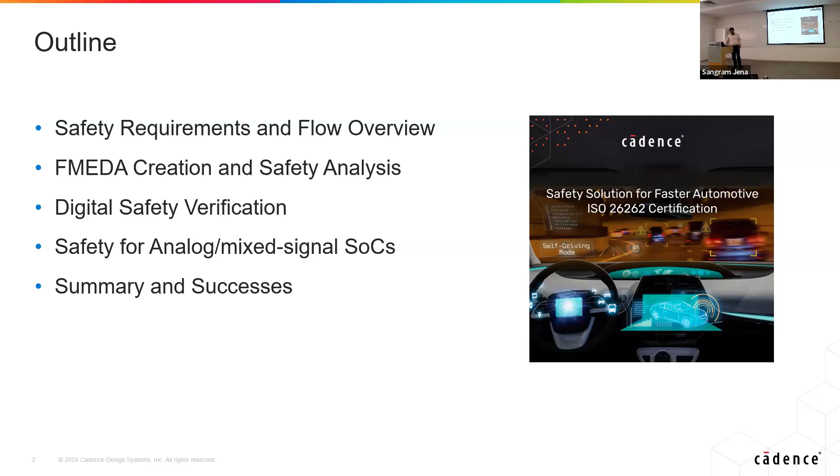So why? As I mentioned, this is a growing market, and key trends are moving towards automotive. There was a mobile market boom in the early 2000s, but now most of the trend is moving towards automotive, and due to this, a lot of new technologies are being developed to cater to the automotive market, especially 3D IC designs, chiplets, and lower nodes. Why are these things needed?

Because automotive is no longer just structural in the way of connecting and doing things. Now most of the control is moving into a central control network, which needs more chips and more interconnected networks. So more and more control is getting into IC design. You need more ICs and more high-speed connections inside the car itself for controlling things inside any automotive, right?

As I said, the industry is responding to the supply chain disruption. We see a lot of OEMs and tier ones getting into SoC designs rather than traditional semiconductors. Tesla and other biggies, and top mobile companies, are also getting into automotive. And traditional semiconductor companies already in the big mobile markets are also entering the automotive space, for example Qualcomm and Samsung. They are getting more into software and automotive platforms.

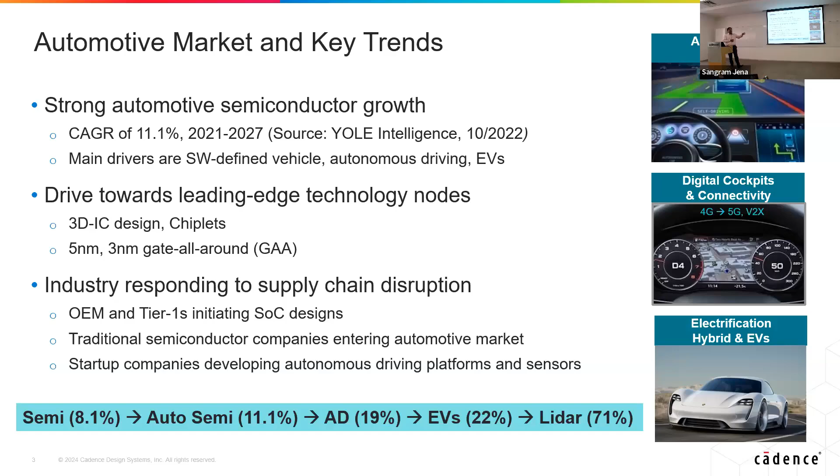Some examples, the top OEMs in the world, Ford and Jeep Cherokee. As you can see, previously a lot of these control networks, if you've seen the previous cars, were usually using copper cables, a lot of these copper cables running in the car, and a lot of these instrumentation clusters getting connected.

Now, we still have the mechanical controls at the top level to connect to the physical end connections, but all these are centrally controlled by what we call a vehicle computer or an integrated compute network, which has connections to a lot of various sensors, and it also connects to a lot of these actuators, which take care of the end results. So this is at a very high level.

There is a multi-threaded OS running in a real-time car with a lot of these hypervisor kind of things. And each one has different functions where we need a real-time response as quick as possible. That is where it is much more safety critical.

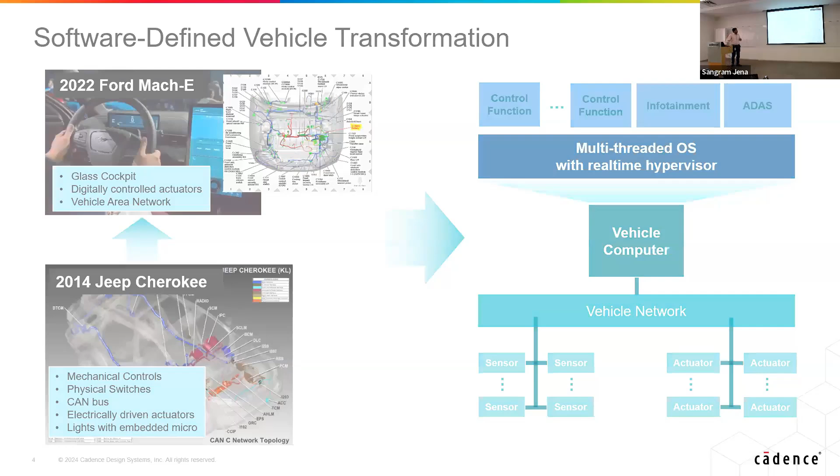This is the famous V diagram. I think no presentation will be complete without this. This is the overall ISO 26262 standard, where as semiconductor companies we primarily focus on parts 9 and 10, and there is a new part 11 which was added to give details about the semiconductor process analysis.

Some of this is the ASIL standards. We have these three metrics, the SPFM, the LFM and the PMHF, which are all interrelated with different metric data, but all this interrelated data will have a combined metric value which needs to adhere to a particular ASIL standard.

Most automotive components in general, any of the chips in the market, will tend to follow ASIL A, which predominantly doesn't need any safety. But for the components, I think Mike's slides also had a slide with a car, the rear light being an ASIL B or ASIL A kind of standard, whereas brake lights and headlights will be prominently in the ASIL B category, whereas your cruise control or adaptive controls will be in the ASIL C category, where there is autonomous control but you can still take control.

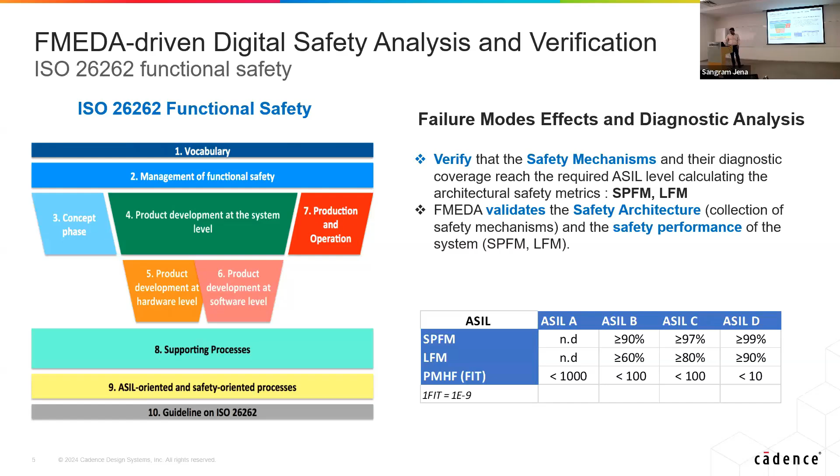Getting into the FMEDA, the slide was supposed to build one by one, but it came as a whole. We will go into detail from architectural till the overall DV kind of view. Whenever we start with the functional safety concept, we start with the functional concept. I think in Mike's slides they brought up the HARA stuff. If there is a slippery, wet road and the brake control is failing, what happens? That is a functional concept.

From there we derive the architectural level data. When we don't have a design, we start with an architectural estimation. That is where the FMEDA architectural exploration starts. You don't have a design, but you know what blocks are there, you know what ASIL library you're getting into, you take estimated data and you create an FMEDA at the architecture level. So these two you are doing at an estimation level, right?

You don't have your design implemented or running anything on it. So you just do an analysis at the estimation level. This can be a little bit more optimistic, but once you get into the details, once you implement it, once you have your netlist or the number of instances, then you can have a detailed FMEDA. You just populate that data into the FMEDA.

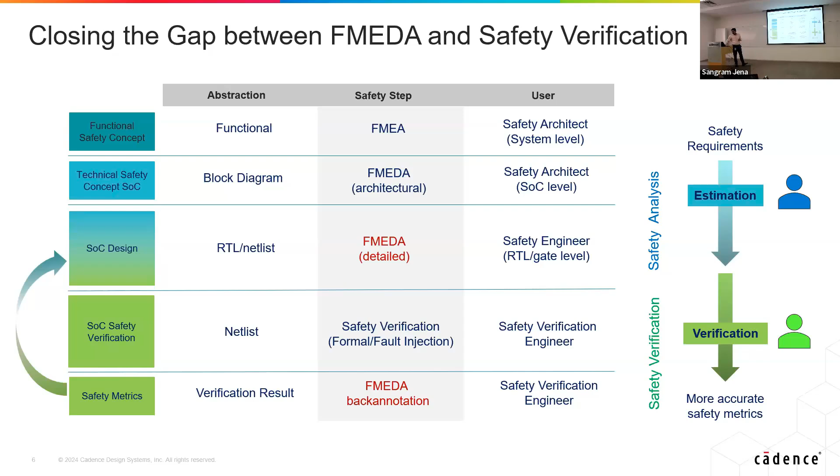So this slide will give you the overall picture, the cycle of things which are happening, and in the next slides we are going to talk about how we are going to do this using a Cadence flow of things. Okay. So as I said, that's the cycle. We start with an architectural FMEDA, and we use this flow to get into a detailed FMEDA and get the results and implement it back to the overall FMEDA.

So we are also working with Accellera. We have a safety format which is called the Unified Safety Format. Accellera is a standard which can be called an incubation to the IEEE standard. But currently in IEEE also there is a working group which is working on a safety standard. So most of the things we are adhering to, but in the end, whatever IEEE standard is going to be there, Cadence will follow that standard also.

Okay. So we call our safety platform the Midas safety platform. So we start with the FMEDA and we create the safety verification plan based on the FMEDA inputs. Once we have this, now we get into the design level details. That is where we run the actual design. Using the USF format, we can gather all the information. We can either use it in our verification flow, where we can do the complete safety verification. On the same USF format, because we have all the gate level details, we can use it in the safety implementation flow, where we can take those details into our synthesis tool, Genus, and Innovus,

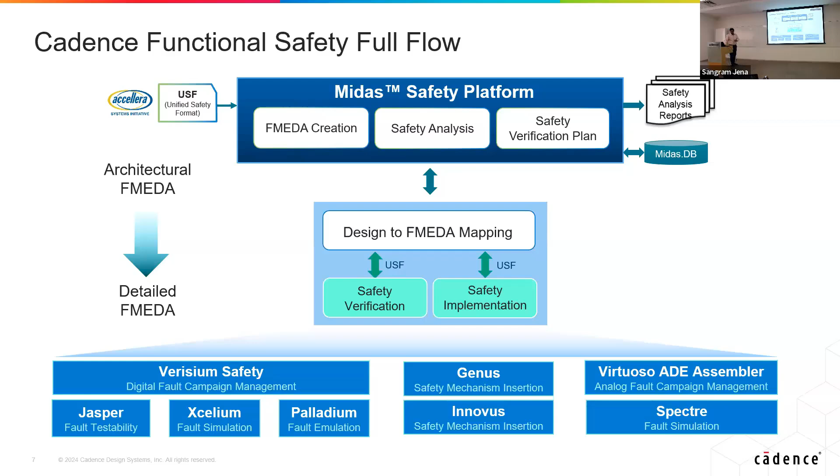Okay, so this is the MIDAS platform, as I said, which can drive both the digital and the analog safety flows. We can do architectural exploration. That means I can start with the architectural FMEDA analysis. We'll come to that in the next slide. Also, we can do early safety analysis or a detailed safety analysis, which is nothing but a detailed FMEDA. We can do both things directly in the same GUI.

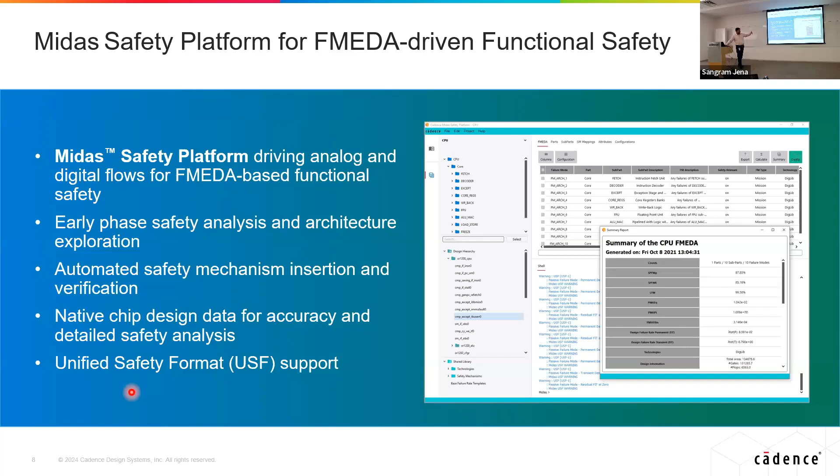And as I said, currently we have support for USF. But again, we also support whatever IEEE is going to get into. And this is how the GUI looks, where it will give you all the details. This seamlessly integrates with the very same safety campaign manager, which we'll see in the next slide. So this is the early architecture FMEDA setup.

So at the architecture level, you just go to the GUI. You select what type of project you are entering, what ASIL you need, whether it is an architectural or a detailed FMEDA, what type of report you need, what the entity is, and then based on this, you come into the next 3 steps where you are creating an FMEDA. In the entire SOC, you can select parts. From the parts, you can select subparts.

Assume your part is your CPU. From a CPU, you can have a subpart like a MAC or an adder, subtractor, whatever it is. And for each of these, you can create failure modes directly in the GUI boxes. And you can have your safety mechanisms. You can map them to the failure modes, run your safety analysis, check the reports. And if you want to do some queries, you can do some queries. We'll see that in the next slide.

And even at the architecture level, you can do some rule checks and see, for example, whether safety mapping is available for all the failure modes or not. So using the rule checks, even before getting into the next steps, you can verify whether your FMEDA is clean or not. At this level, you can start directly with the GUI.

It's not like it can't be done otherwise. A lot of these companies use an XLS-based flow. They have some Python scripts for everything, and they run them. All these are integrated into a single GUI-based flow here, making your life much, much easier.

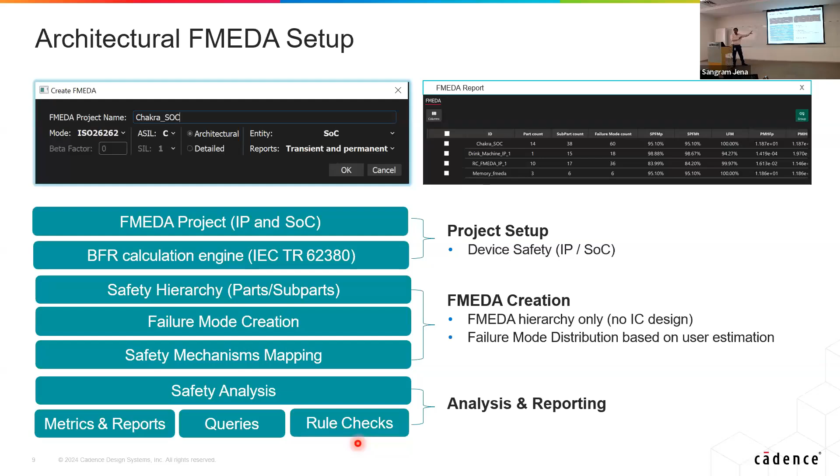So this is what we do at the architecture level. We take the architectural FMEDA now, that's based on the estimated data. Sorry about it. We create the FMEDA, then we create a verification plan. Then we take this at the architecture level.

Now we get into the design level stuff. We take the design, we are using the USF. We take the design, we map it with the implementation tools like Genus or the verification tools like Xcelium and Virtuoso for digital and analog simulations. Then we take this mapping.

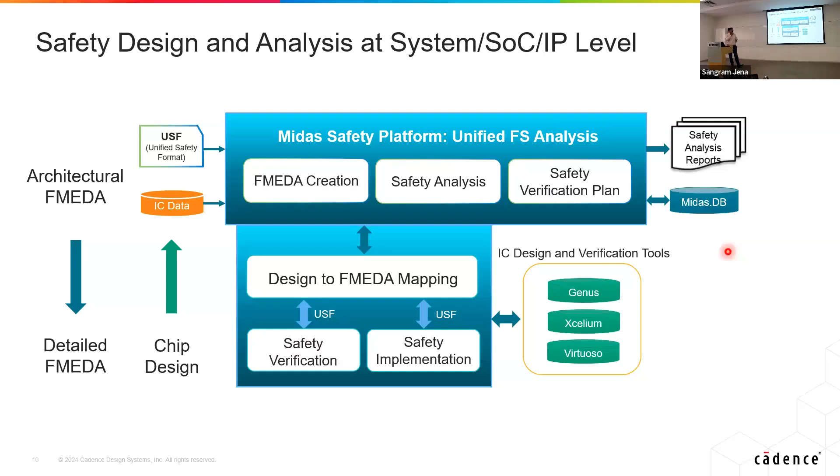This data, what we collect, is called the overall chip design data. That we pass it on as IC data, back annotated with the architectural FMEDA. So this is the cycle which usually happens in any of your safety cycles in any of the industries.

Yeah, whatever we discussed in the previous slides, more at a GUI level. You start with the architectural FMEDA, that is the GUI which was missing two slides back. You have the architectural FMEDA getting created. Here you don't have any of the design data, but you only have the FMEDA hierarchy.

You have the failure rates and distributions based on early estimations, based on your rough analysis kind of thing. Okay, these are the blocks which are there. These are the gates which I'm going to use. So roughly, these are the numbers which might come here. So this will be a little bit on the optimistic side.

So now I take the design, I implement the design, I get a netlist. From the netlist, I know the number of instances, the total area count, all these details, I just pick it. The advantage, as we saw in the last slide, is the tool is directly connected with Genus, Xcelium and the Virtuoso platform. So the tool can directly get this data.

If you are using an XLS-based flow, you need to manually enter all these data by yourself. Whereas here, the tool is automatically connected. We know what instance data is there. It populates the data and automatically you see, I think this is very minor, but you can see the SPFM data which is there.

Compared to the previous SPFM data, this is a little bit lower because before we just put an estimated number, more on the optimistic side. Whereas here with the design data and the mapping, I have this estimated data a little bit on the pessimistic side, or a little bit realistic.

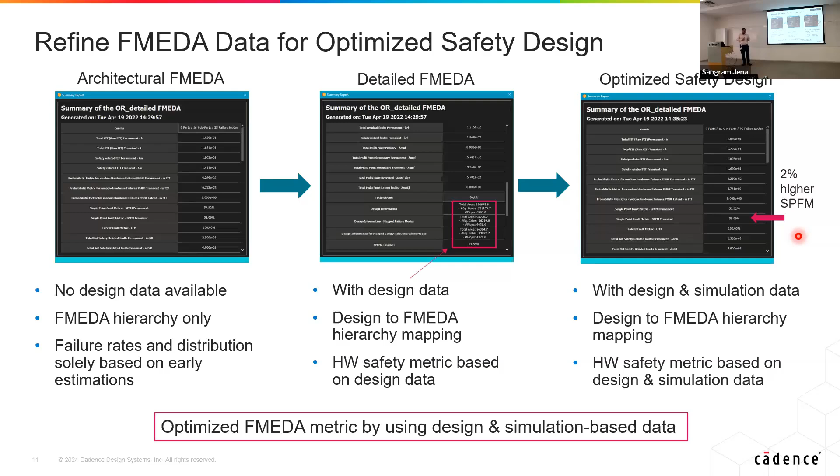The same thing we saw in the GUI can also be done using the USF commands. Very simple. Set FMEDA. I can set up my FMEDA. What type of ASIL metric is needed? Is it B or C or whatever it is? And what type? Is it an architectural or a detailed FMEDA? What type of technology am I using? What type of BFR calculation am I using? I can set all these things using commands.

I can create a technology for digital, and set the FIT data for it. And as I said, these are the parts and subparts which I can create for my FMEDA. We can start with a CPU core. This is my CPU core. For my FMEDA, I can either give the instances of my part, or I can directly give a gate count for it. Both are possible for the calculations.

And now I can also add multiple subparts. The CPU has multiple subparts. I'm here putting one subpart as fetch. I can have multiple other things like add, subtract, multiply, or MAC, or whatever it is. For each of these, I can again give the instances or the count data.

Now for each of these architectures, I can create a failure mode, and also I can assign a safety mechanism to these things. So I create a failure mode and say, okay, what is this type of failure mode which I'm creating, and what is the part number which is associated with this particular failure mode. I give this data and I can say what is the type of fault: is it a permanent fault or a transient, or what is it? I just can specify it directly here.

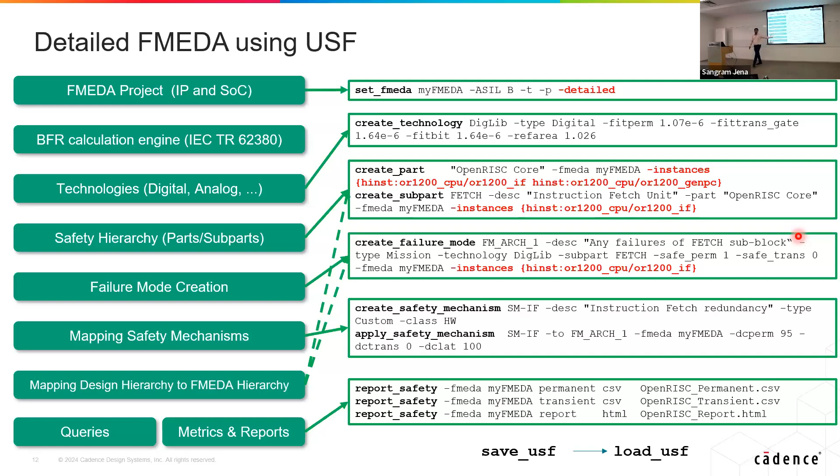You can query it. And at the end of the day, once your safety campaign is done, you can generate a report directly from this command, and you can generate this report either for permanent, transient, or an overall report, which you want to give to your end customer. So that was the how at a very top level.

And as I said, we start with one GUI at the top. So for the end user, it is going to be a top-level MIDAS safety platform GUI from where he's going to launch things. And if there is a DV engineer who is already using a Cadence flow with the Cadence Verisium Manager, things are going to be the same for him. The extra part for any safety engineer is that he needs to understand the FMEDA concepts. Otherwise, the rest of the flow is going to be as simple as that.

When I say the rest of the flow is the same, that is for logical simulation using Xcelium as well as the STL flow for emulation. So that is how we do things currently. However, as you note, one other point: the fault DB is common for all three engines. That means the same fault DB which we are using for the regular logical simulation will be used by the formal engines to prune some of the faults, and the same can also be used at the Palladium level.

So if you're having an overall SOC level campaign where you are using some of the STL libraries to do the emulation, as well as a regular SV UVM flow to do some of the logical simulations, you can have one single fault DB where the entire campaign, the entire DC coverages, can be mapped to your overall test plan. We'll see that in the next slide.

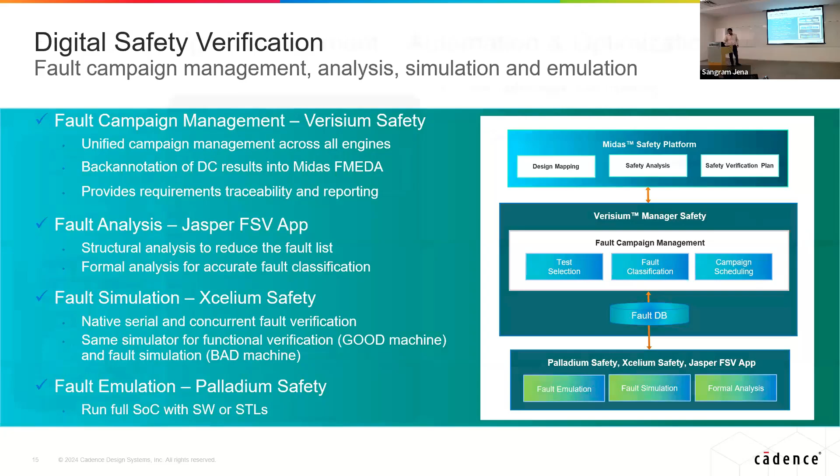Yeah, I'll just build this.

So this is what I was talking about in the previous slide. So overall, for a user, as we saw in the previous slide, the top MIDAS platform is there. That will give the FMEDA as an input to the Verisium Manager safety app. Now this has the various lists: your fault list, your strobe list, your test list, and your campaign configs. And this you will be running with any of the engines.

We forgot to add the Palladium safety, but assume Xcelium safety and Palladium safety can be done at this stage. And you have a common fault DB. So this common fault DB is used by the structural analysis or the formal engines for your overall fault reduction. Why do we need fault list reduction?

However efficient or fast your logical simulator can be, this is a very expensive campaign, right? Your fault campaign is going to be much, much more expensive, where you're going to run n number of runs. So instead of that, use the structural analysis or your testability analysis to prune your overall fault list. You can collapse it.

If some of the assessors allow statistical fault sampling, you can just sample either 1% or 5% of the overall faults and just use them, or you can use the fault collapsing mechanism, which is inbuilt in the Jasper engine. Use that and reduce the lists to only the most necessary campaigns. You only run those campaigns, right?

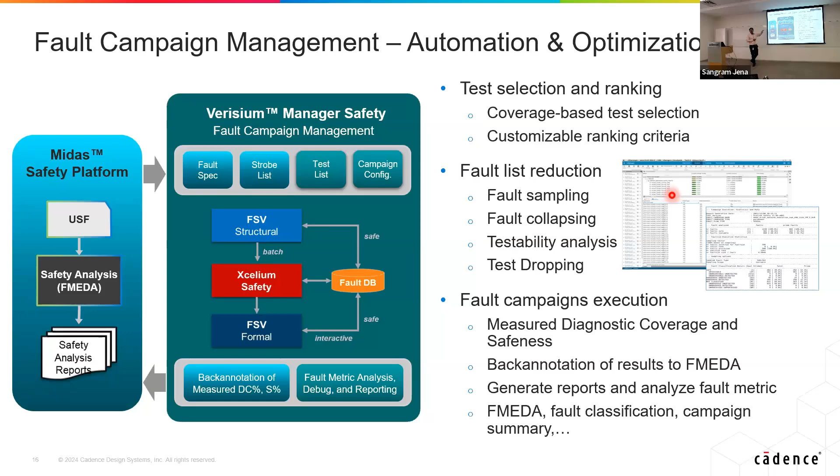And if some particular test is not working, or you need to debug or relaunch it, you can immediately switch to serial mode and run it, primarily for debuggability purposes.

If something is not getting executed in concurrent, you can very well switch that particular test, or this campaign alone, to a serial flow and run it, so that you have the best of throughput and the best of debugability, both in a single thing. So we support all three. You can start with serial, you can start with concurrent, or you have a hybrid flow where you can start with either one of these and switch to the other. So we have all the support for this.

We also have a flow we call the capture replay flow. We also have support for capturing and replay. We capture at some strobe list, we can capture the data and we can replay it. This is for huge designs. We support it, but we need to exercise it with caution. This can be a little bit error prone if you're not doing a capture properly and replaying it at proper cases. But we do have that support also.

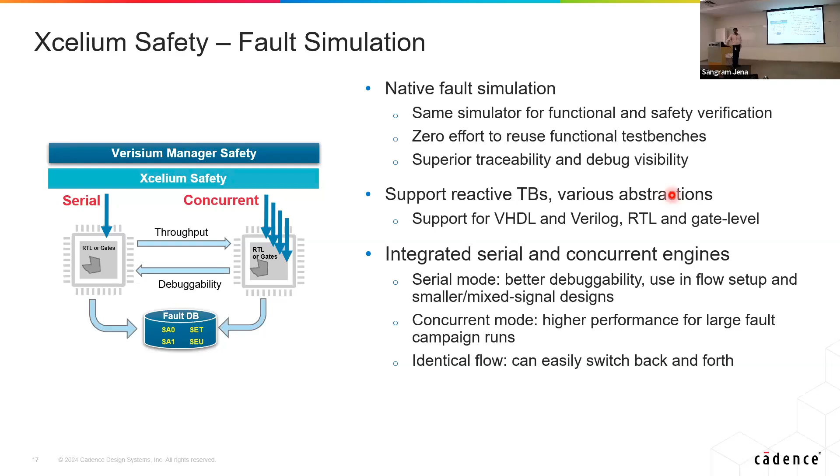Same case with Palladium. As I mentioned, the flow is literally the same. You just replace Xcelium with Palladium, and you can see this is nothing but a simulator flow, right? The simulator flow just replaces the engine. This engine is a Palladium engine and IXCOM compile. Again, you can see there is a central fault database. You can run the good simulation, you can run the fault simulations, and at the end you just do a compare, get the fault DB and pass it on.

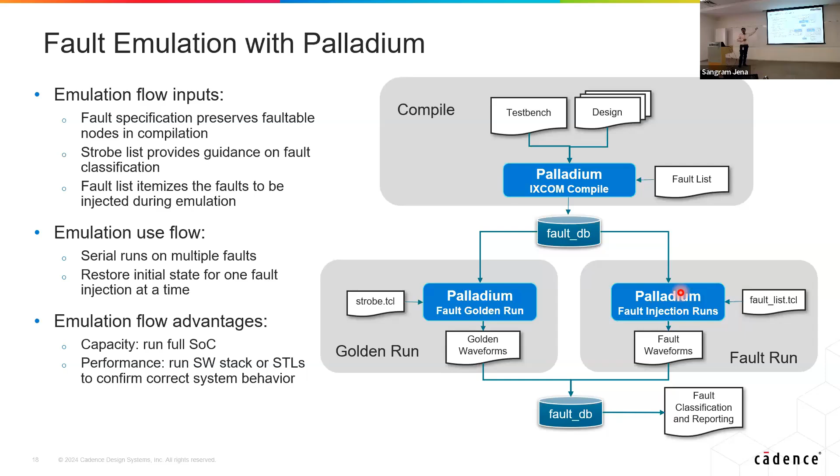Mostly, as I said, we are using it for the software stacks, or now there are virtual platforms getting developed. Like we have Helium, there are a lot of these virtual prototyping platforms where the software teams need a lot of software stacks to be created for automotive, right? OEMs need a lot of these things. So when you are moving to a platform like Helium, you can't run those software stacks with a logic simulator. You need a hardware platform. So your virtual platforms will be connected to Palladium. You run the entire software stacks through this and get your safety mechanism.

What we saw two slides before on Jasper, as I said, we do a structural analysis. First, we annotate the untestable faults in the database. Here we ignore all the safe faults and check only the prime faults, and the equivalent faults of those prime faults we ignore. For example, if there is an output driven by multiple inputs, a stuck-at on one of these inputs is going to propagate. So I can ignore all these equivalent faults and check only the primary fault. Then, once you do this, you use the FSV test constants to check all the particular tests.

You can see only what is needed for it, and then all the pruned test-based faults can be dropped. Once they are dropped, you have an optimized fault list which goes to the Xcelium safety campaign, and you will get to the annotation. In the end you will still have some 10% of remaining fault list. Up to this point, all these things are part of the flow.

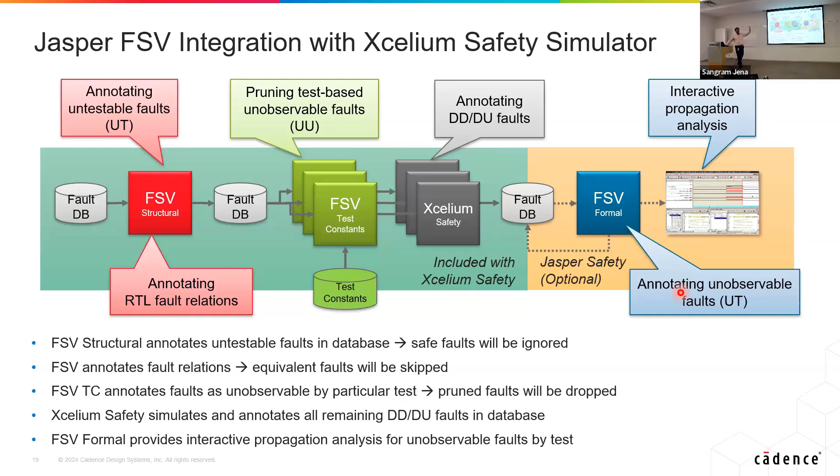You can still use Jasper, some of the properties of the FSV app, and then interactively do some analysis on it. On the remaining 10%, it can still do some analysis on the unobservable faults, and you can classify them into DD, DU, or UT. The green part is there with the tool. The Jasper part is the additional thing needed in the flow. But if you're writing a script or it is part of the campaign, in the campaign configurator you can select all these things and run it as part of one campaign. There is now more and more need for verification IPs for automotive.

As most of you know, Cadence is the market leader in verification IPs, and specifically focusing on automotive, we have a lot of these VIPs which are very mature and capable. As I said, we are moving away from traditional copper wire based mechanical networks to bus based networks, where you have Ethernet TSN, MIPI, or even now PCI protocols and other things getting into the picture, and we support all the CAN-FD protocols.

Going forward there will be UCIe and other things also coming in because of chiplet based design. So we have support for even UCIe and probably CXL and other things.

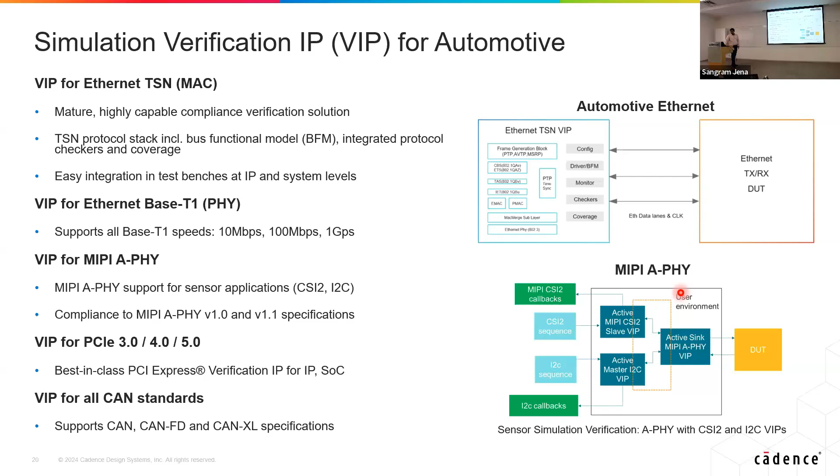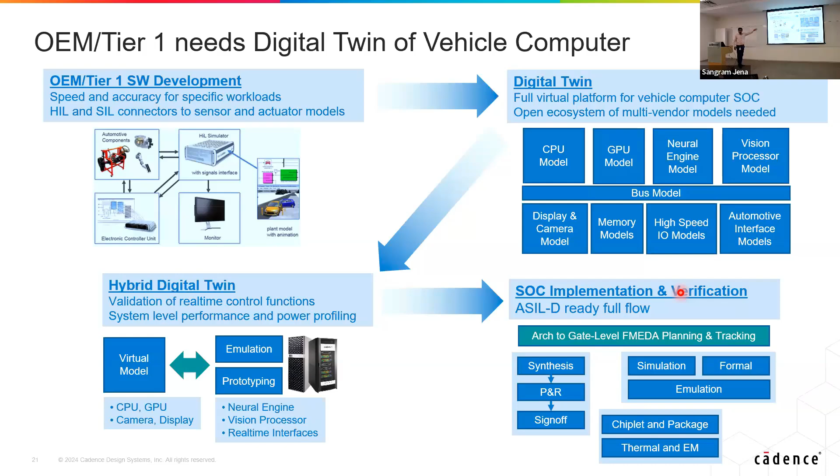This is what I was mentioning on the need for Palladium, because it is no longer just a hardware only area we are working in, right? Not just the STLs, but we also go beyond that, to the software stacks. All the OEMs need the entire software development. So can they do it before the hardware is ready?

That is where you get into virtual platforms, or in Cadence it's called Helium. You take a loosely timed model, you create a hybrid model. It's loosely timed, but you can do OS booting. You can get it early, even before the hardware is completely ready, because you're just making a virtual model. You can run it on any standard x86 workstation.

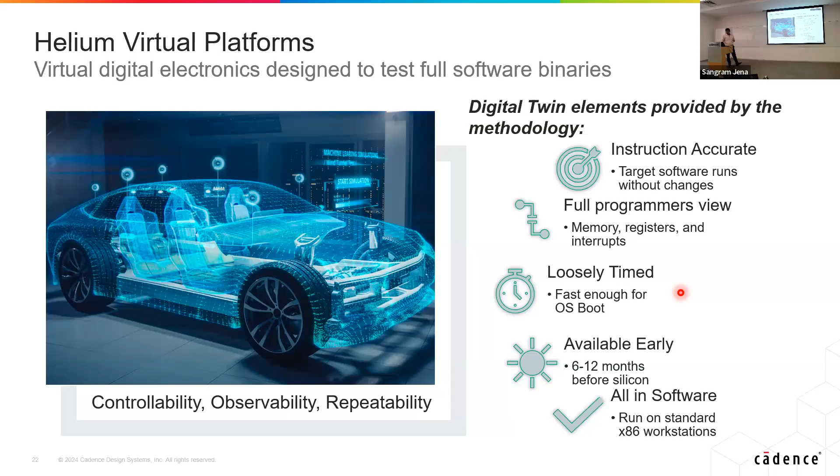This is primarily for software development, but you can still have a view of your memory registers, your overall control, like your interrupts and the pins, at a high level of abstraction. Take this and integrate it with your hardware, like Palladium or the Protium platform, which is already safety flow enabled. So you can run something already proven on your safety platforms. This will give you performance as well.

Even before the final chip is available, you are proving your software before everything is available on the chip. That's the advantage of getting into the virtual platform.

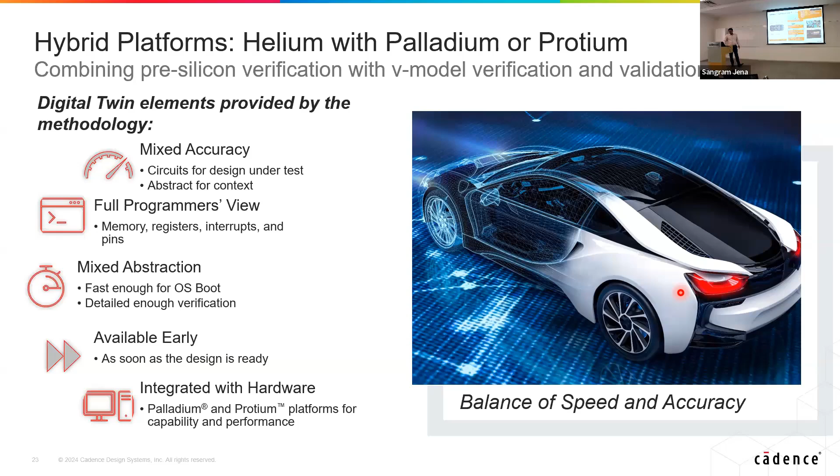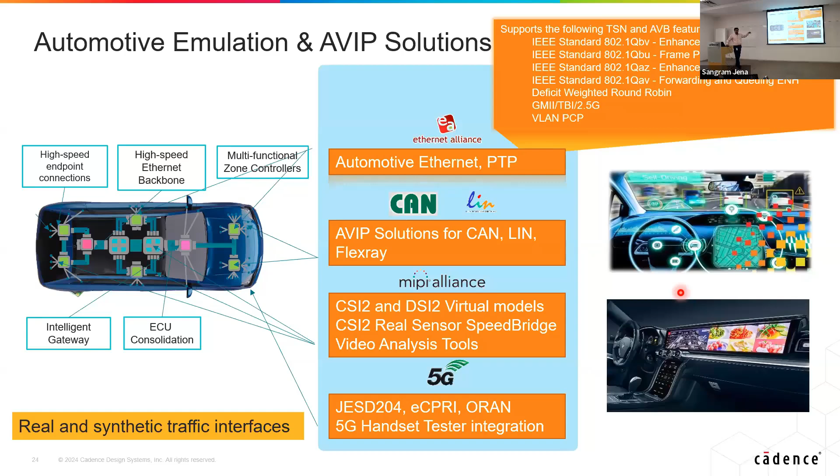Again, this means I can use the VIP at the logic simulation level. Then when I'm going into hardware, do we have hardware acceleratable VIPs? Yes, all these acceleratable VIPs are available for the automotive market. You have MIPI, CAN, Ethernet, and 5G related VIPs, all available as AVIPs. That means not just in logic simulation, you can do the entire setup and verify things in hardware also, like your emulation platform.

Getting into safety, as I said, Cadence is one of the leaders in simulation platforms. Our Midas platform is integrated with the AMS campaign and the simulators. We directly collaborate with the Virtuoso platform and Spectre. We have the reliability analysis, Legato. So we run the campaign with the same flow, map it to the Midas platform, and back annotate the metrics directly to the Midas platform.

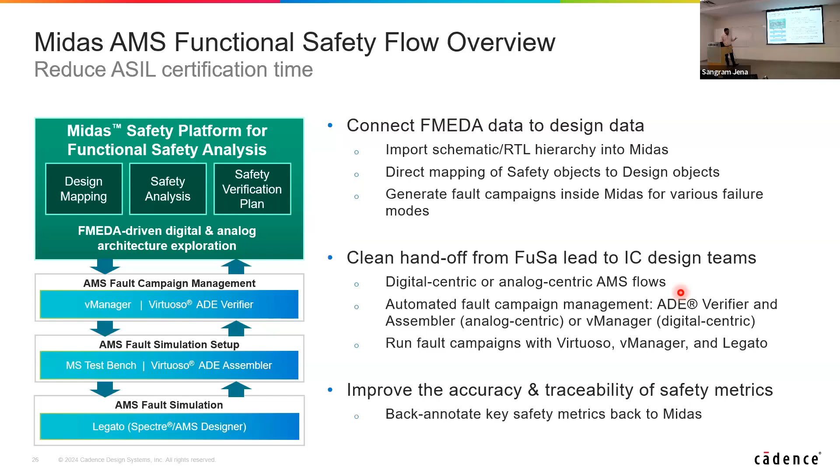Similar to digital stuck-at-0 and stuck-at-1, here we have short and open kinds of faults. You identify the faults, you simulate them, similar to good and bad simulation, then you get the overall coverage analysis, which you can directly see in Virtuoso ADE. Similar to how vManager connects to Xcelium, you can directly see the analog coverage data in Virtuoso.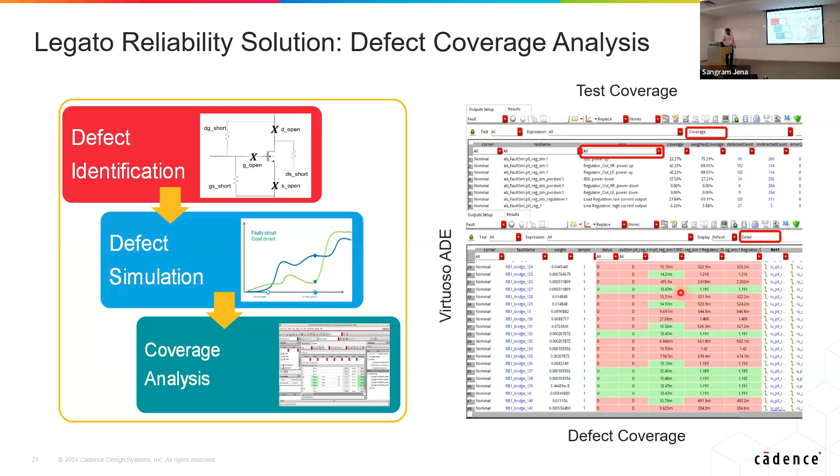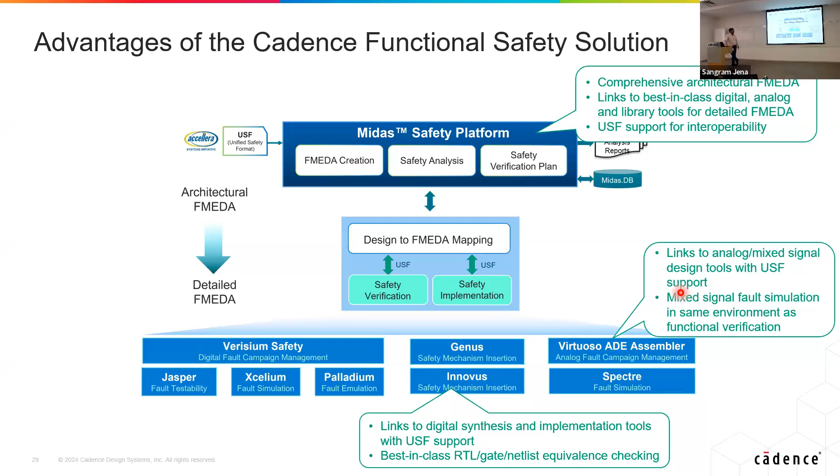In summary, these are the overall advantages of the Midas platform. You have one single window, a comprehensive flow for both architecture and detailed FMEDA. We support USF for interoperability. It is directly linked to the digital and analog mixed signal flow, and also to the digital synthesis and implementation tools.

So from a single platform, we have the best-in-class verification management solution based on our vManager, where we launch our fault campaign. It gives all the data for your functional verification and fault simulation, and the debug experience is far superior. It's not two different tools. The same tools and debug experience you use for logic simulation or AMS simulation, you can use in this flow.

And as I said, you can use the fault emulation flow using our Palladium safety to completely verify the entire SoC, even with the software stacks.

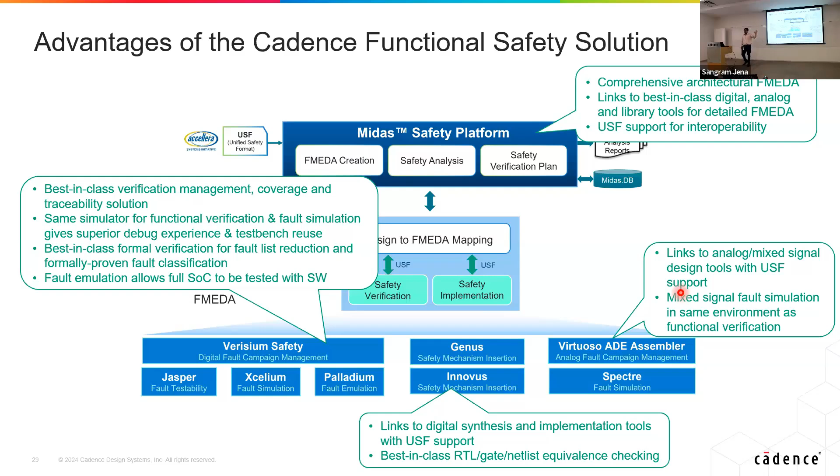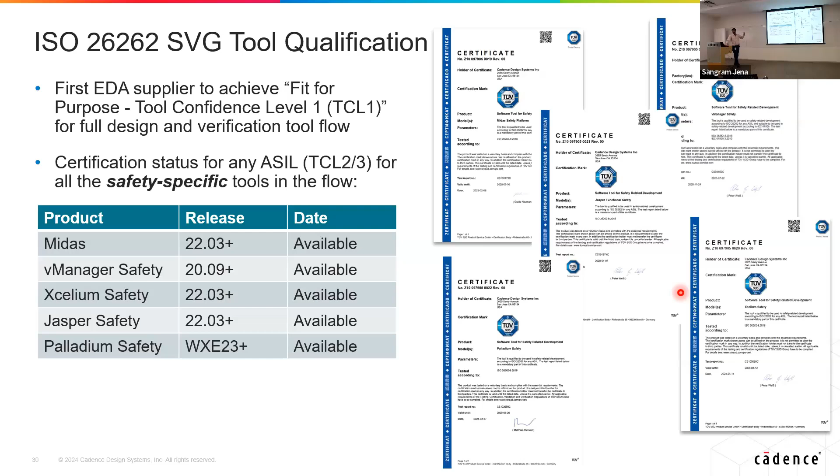And all our tools are TCL1 qualified, any of the Cadence tools. However, for any of the safety-specific flows, we are already TCL2 certified. So from these versions onwards, all the new releases coming in are constantly on the way towards the certification, and we are already there.

We also do functional safety services. So if someone is a new OEM or a semiconductor company getting into this and they want the ISO 26262 certification, we take the complete flow with them, starting from the architectural analysis till the safety manual creation. We work with them and get the things done for them.

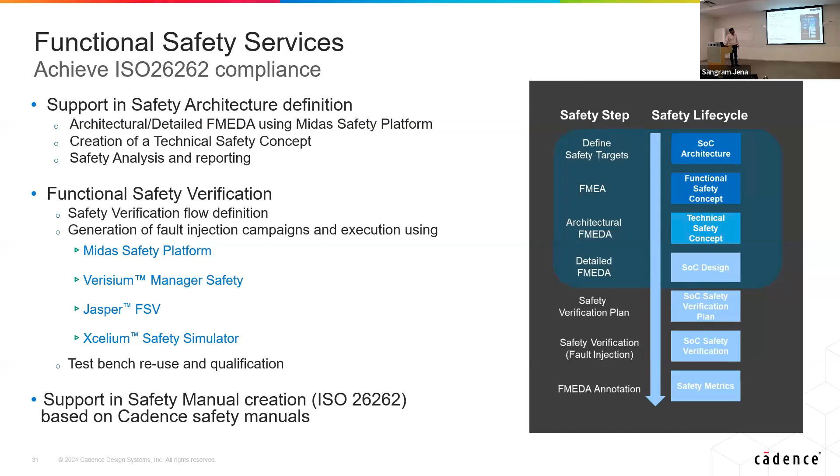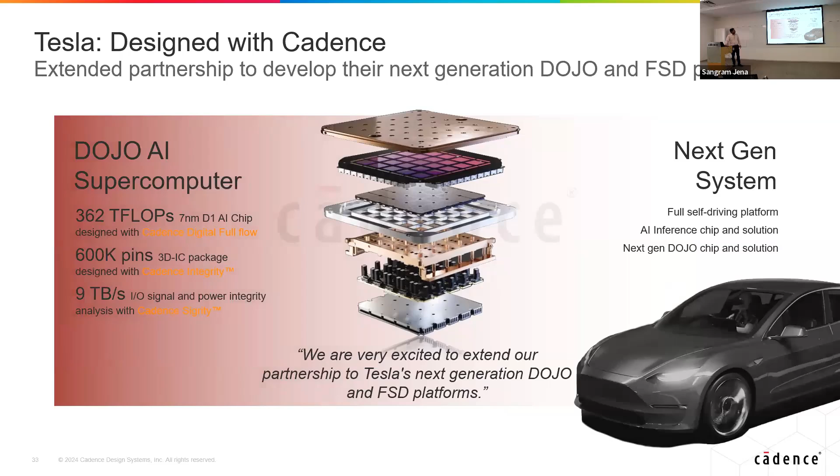Is there any runtime difference? Based on how big your campaign is, yes, there will be, but not on the simulation. I think if this is going to run for 1 hour, probably this will take like 1 hour 10 minutes or something. But the number of runs, if you are specifying the cone of observability points and other things, can reduce. But yeah, it's similar to your logic simulation runtime.

Has anyone tried the safety emulation flow these days? My question is, are any of your companies doing virtual platforms or getting into the emulation flows as of now? Or are mostly all of you in the simulation market? You're using simulator-based campaigns?

Okay, so this is getting more traction now. We have seen it with some of the top guys, but I just wanted to gauge this. A lot of asks are coming on that side. So any requirements or needs, more than questions, because some of the guys are already doing things. So I think the flow is there. Yes, this is there. In the Cadence support site, you have this case there.